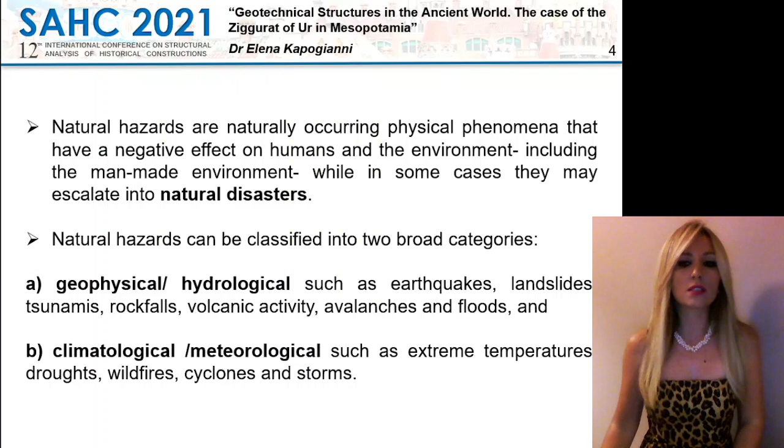Natural hazards are naturally occurring physical phenomena that have a negative effect on humans and the environment, including the man-made environment. In some cases, they may escalate into natural disasters. They can be classified into two broad categories: A. Geophysical-hydrological, such as earthquakes, landslides, tsunamis and rockfalls, and B. Climatological-meteorological, such as extreme temperatures, droughts, and wildfires.

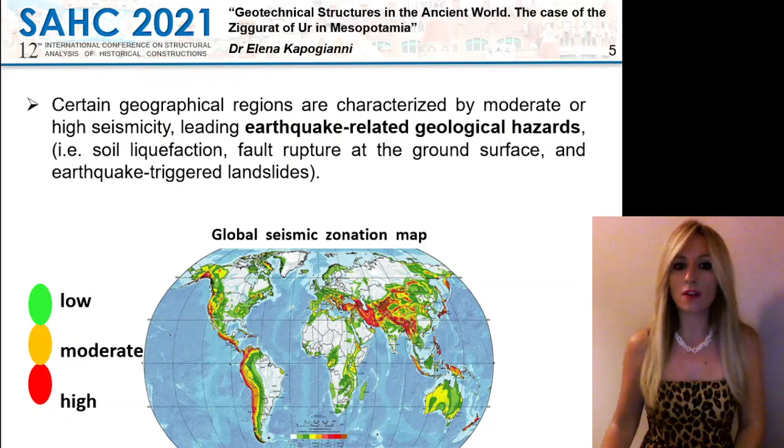Furthermore, certain geographical regions are characterized by moderate or high seismicity, leading to earthquake-related geological hazards, such as soil liquefaction, fault rupture at the ground surface, and earthquake-triggered landslides. As aforementioned, natural hazards and disasters have always accompanied human history.

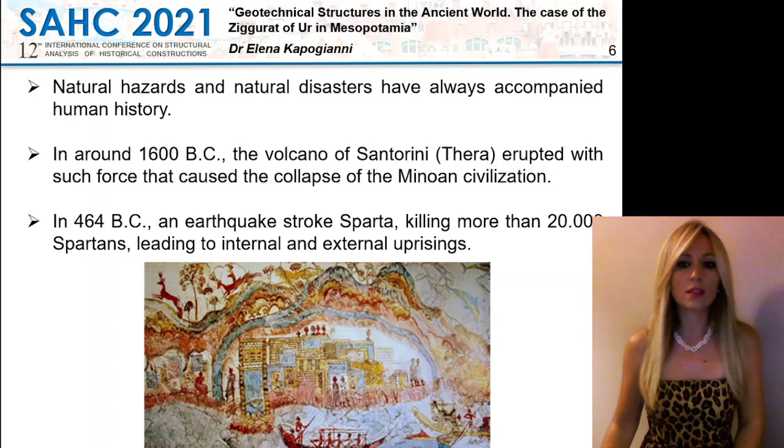In around 1600 BC, the volcano of Santorini, Thera, erupted with such force that it caused the collapse of the Minoan civilization. In 464 BC, an earthquake struck Sparta, killing more than 20,000 Spartans, leading to internal and external uprisings.

In 373 BC, the ancient Greek city Helike, the flourishing capital of the Achaean League, was destroyed during a winter night, probably due to a rapid and catastrophic landslide and due to a massive tsunami. The dramatic destruction of Helike was widely discussed by many Greek and Roman authors and may have inspired Plato to contrive the myth of Atlantis.

In Europe, a well-known case of an extreme natural disaster was the Great Lisbon earthquake in 1755. Approximately 60,000 people died due to an 8.5 magnitude earthquake and the subsequent seismic activity.

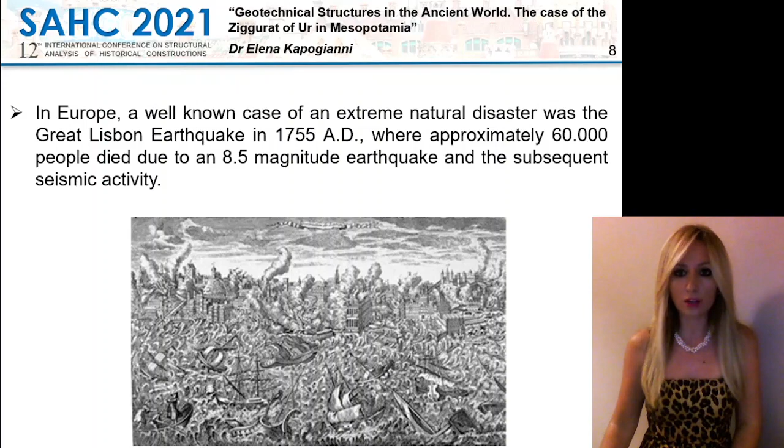Hazard and disaster mitigation and rehabilitation is a very important topic in engineering and in geotechnical engineering in particular. This has been made clear since the very early years of humanity. Initial efforts of humans to understand the basic principles of geotechnical engineering date back to the prehistoric ages. The attempt to control natural phenomena and hazards with the use of soil as a construction material has probably taken place well before the historical records.

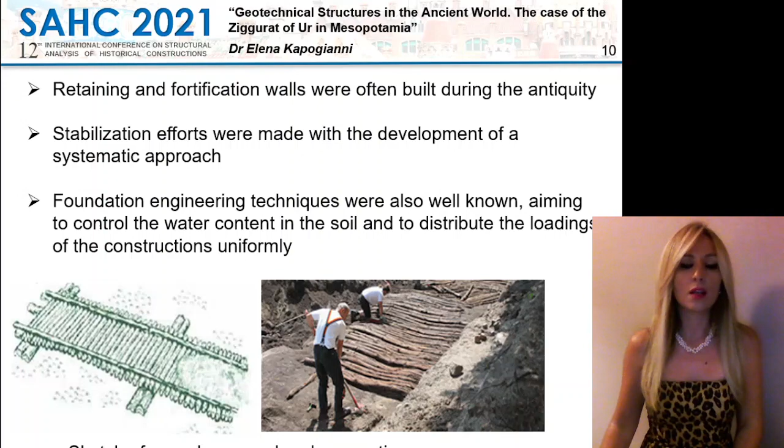For example, retaining and fortification walls were often built during antiquity. Stabilization efforts were made with the development of a systematic approach. Foundation engineering techniques were also well known, aiming to control the water content in the soil and to distribute the loadings of the constructions uniformly.

A well-documented example is the fortification walls of Troy, which were built during the Bronze Age. The Great Walls of Troy were constructed using large hewn stones attached together, including also a layer of soil between the foundation and the bedrock. The Great Walls of Troy are considered to be quite anti-seismic since the earth fill of the sub-foundation acted like a seismic absorber.

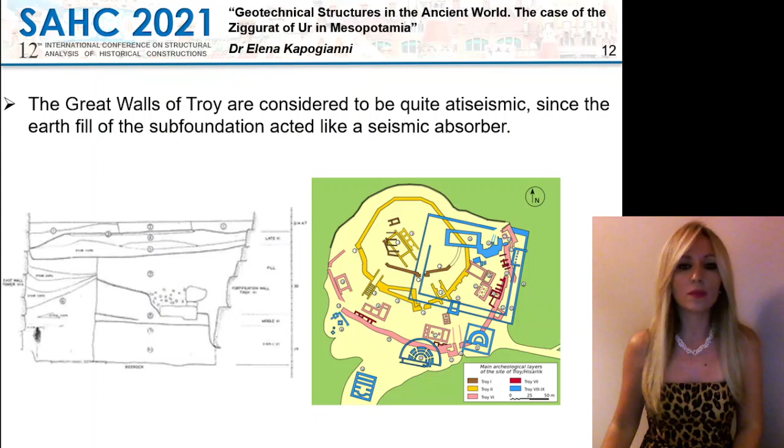Another example of an ancient geotechnical structure is the polygonal wall in Delphi, in Greece, where the sanctuary of Pythia was located. The walls were built from stones with curved joints that had excellent adaptation between them.

The Acropolis of Athens also includes extensive geotechnical works. Among the standing monuments of the hill, the Parthenon, the Erechtheion, the Propylaea and the Arrephorion, the circuit wall serves a pure geotechnical purpose since it functions as a typical gravity wall, retaining the backfill that forms the plateau of the Acropolis.

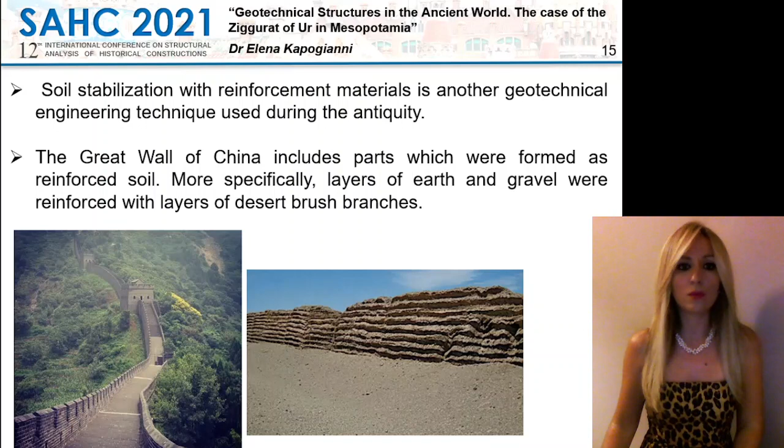Soil stabilization with soil reinforcement materials is another geotechnical engineering technique used during antiquity. The Great Wall of China includes parts which were formed as reinforced soil. More specifically, layers of earth and gravel were reinforced with layers of desert brush branches.

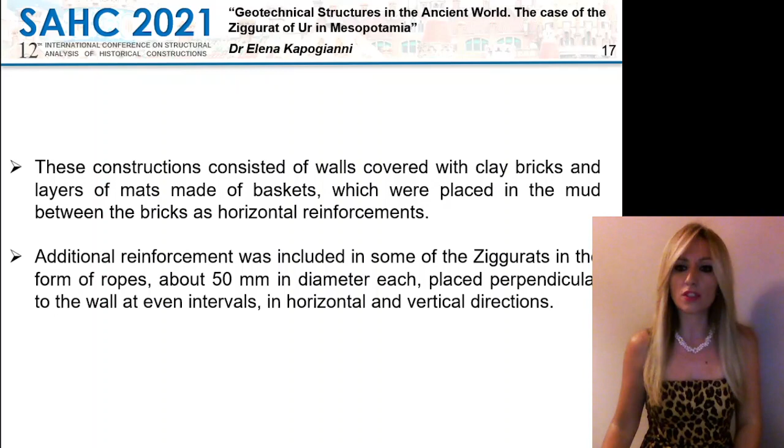Furthermore, the ziggurats, which were built by the Sumerians, the Babylonians and the Assyrians in ancient Mesopotamia, also included earth-reinforced techniques. These constructions consisted of walls covered with clay bricks and layers of mats, which were made of baskets and placed in the mud between the bricks as horizontal reinforcement. Additional reinforcement was included in some of the ziggurats in the form of ropes.

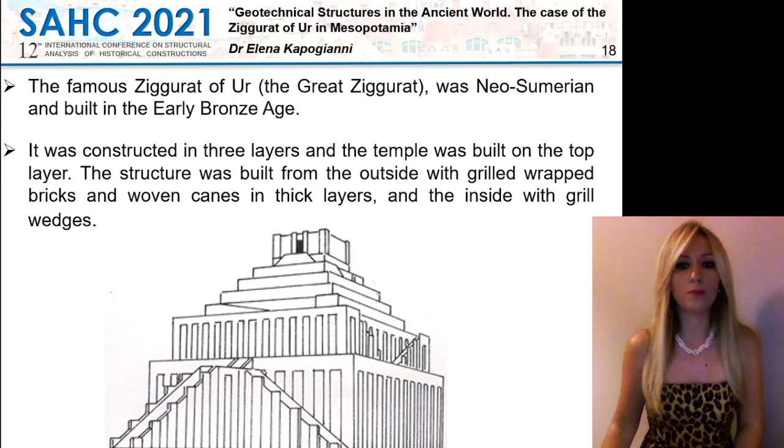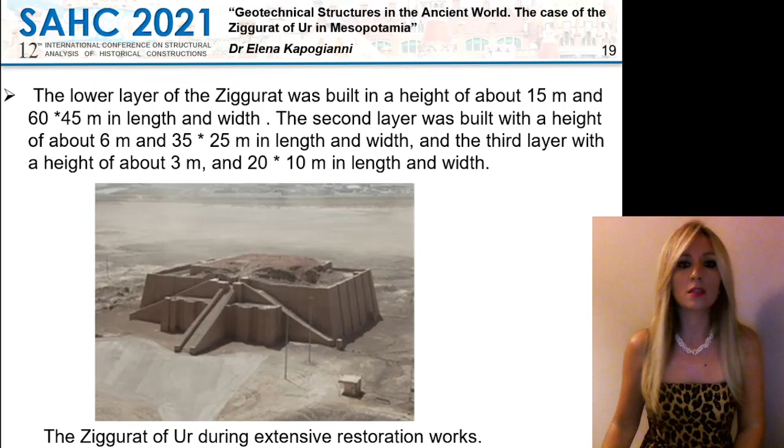The famous Ziggurat of Ur, the Great Ziggurat, was a Neo-Sumerian and built in the early Bronze Age. It was constructed in 3 layers and a temple was built at the top layer. The lower layer of the ziggurat was built in a height of about 15 meters, the middle layer with a height of about 6 meters, and the top layer with a height of about 3 meters.

Various scientific methods and techniques can be utilized in order to investigate the behavior and the structural response of structures and monuments of cultural heritage sites. For example, smart instrumental monitoring and remote sensing can provide real-time information of both the natural hazards and the corresponding vulnerability in terms of structural response and distress, leading to a dynamic, time-dependent structural risk assessment.

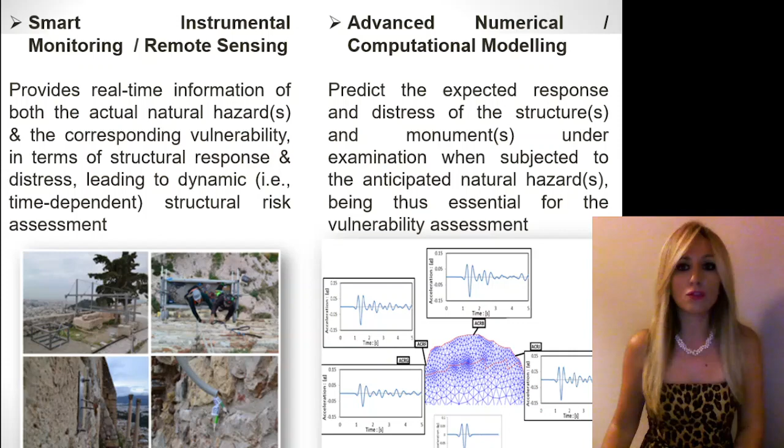Furthermore, advanced numerical modeling can predict the expected response and distress of the structures and monuments under investigation when they are subjected to the anticipated hazards and structural loadings. Advanced numerical modeling is essential for the vulnerability assessment.

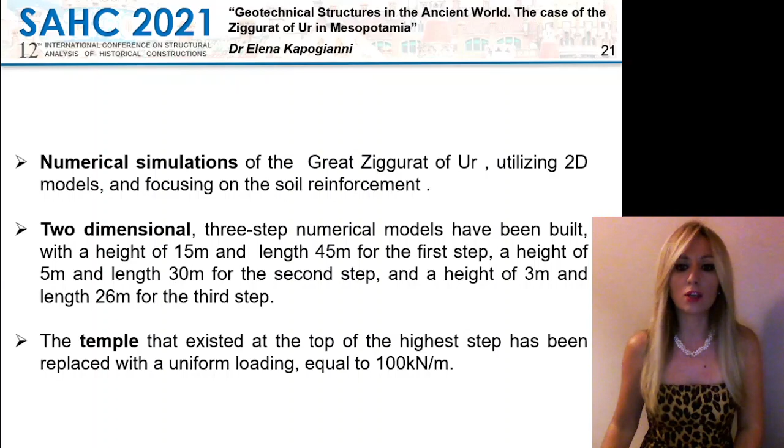For the purposes of the current study, numerical simulations of the Great Ziggurat of Ur have been performed by utilizing 2-dimensional 3-step numerical models. The mechanical and geometrical characteristics of the numerical models are similar to those of the original construction. The temple that existed at the top of the highest step was replaced with a uniform loading equal to 100 kN per meter. Non-cohesive sand was used for the soil material with a friction angle equal to 35 degrees, and inclined walls were included at the exterior surface of every step following the original inclinations.

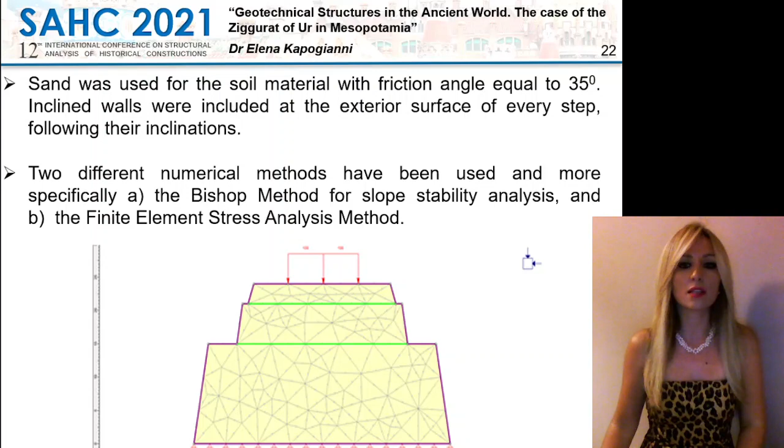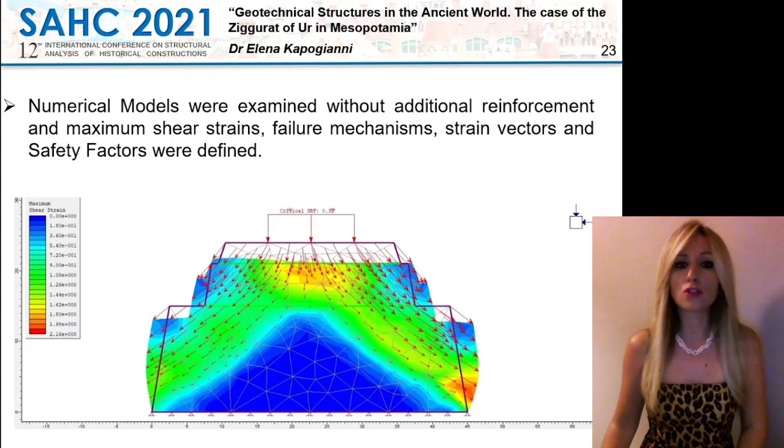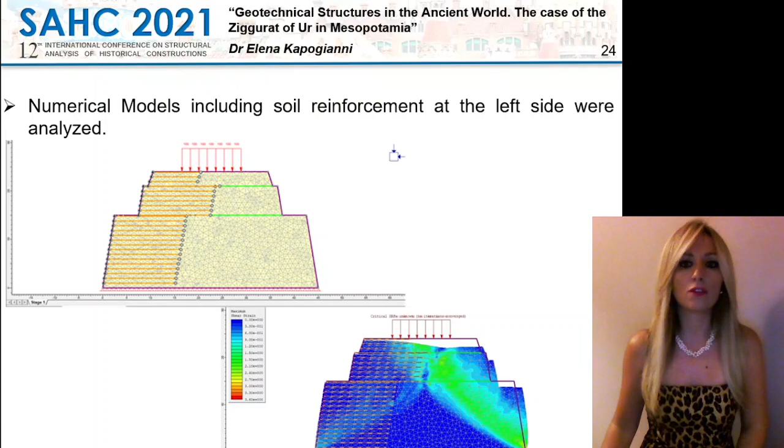2 different numerical methods have been used, and more specifically, the Bishop method for slope stability analysis and the finite element stress analysis method. Numerical models were examined initially without additional reinforcement, and the maximum shear strains were calculated, as well as the failure mechanisms, the strain vectors, and the safety factors. Furthermore, numerical models including soil reinforcement at the left side of the model were analyzed. Significantly smaller deformations were calculated at the left side of the models, which included the soil reinforcement, as expected.

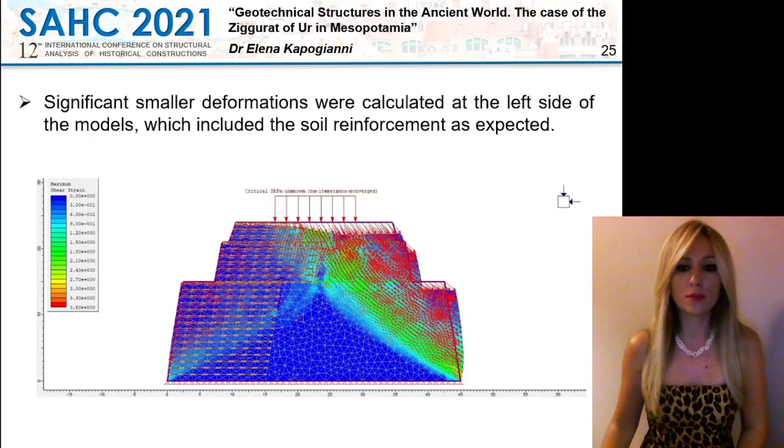In conclusion, ancient civilizations had awareness of advanced construction techniques and applied reliable methods to deal with structural loadings and various natural hazards. The remains of such structures can be found today at different archaeological sites worldwide. Earth-retaining techniques used for the construction of the massive pyramid-like structures, ziggurats, were examined, and more specifically, the contribution of soil reinforcement to the structural safety.

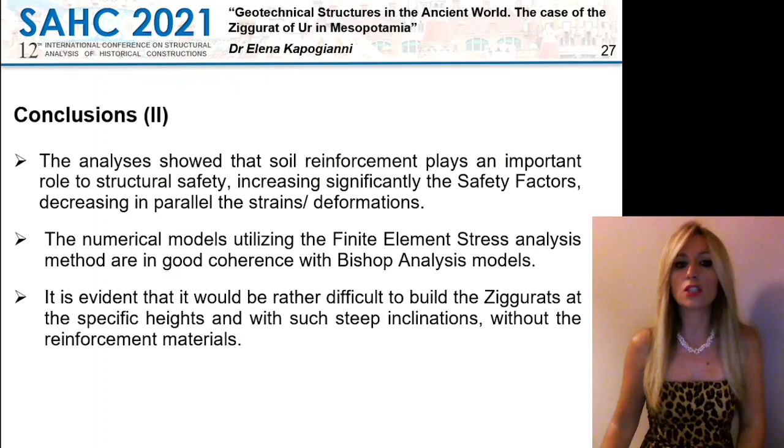The analysis showed that soil reinforcement plays an important role in the structural safety, increasing significantly the safety factors, decreasing in parallel the strains and the deformations. The numerical models utilizing the finite element stress analysis method are in good coherence with the Bishop analysis models. It is evident that it would be rather difficult to build the ziggurats at the specific heights and with such steep inclination without the reinforcement materials.

And some comments for potential further research. Cultural heritage sites include sensitive engineering structures and monuments, not only temples and buildings, but also masonry retaining walls with limitless lifetime and rather limited intervention options. They comprise fundamental elements of the national and international heritage and they feature an elevated risk level. Their overall risk is very high for two reasons. First, a serious damage and especially a total failure may be irreversible and thus unacceptable, and secondly, a failure may lead to injuries or even fatalities.

The assessment of the structural risks of structures and monuments of cultural heritage sites can be achieved through the quantitative assessment and management of the main natural hazards and loadings and the vulnerability of the structures and monuments. The combination of scientific methods, such as advanced numerical computational modeling with structural monitoring, can assist in this regard.

Concerning real-time structural monitoring and remote sensing, I would like to encourage you to take a look at the other paper that is included in the conference proceedings and is entitled Quantification of the Structural Response of Historical Construction, Investigation of the Strain Variation at the Acropolis Circuit Wall.